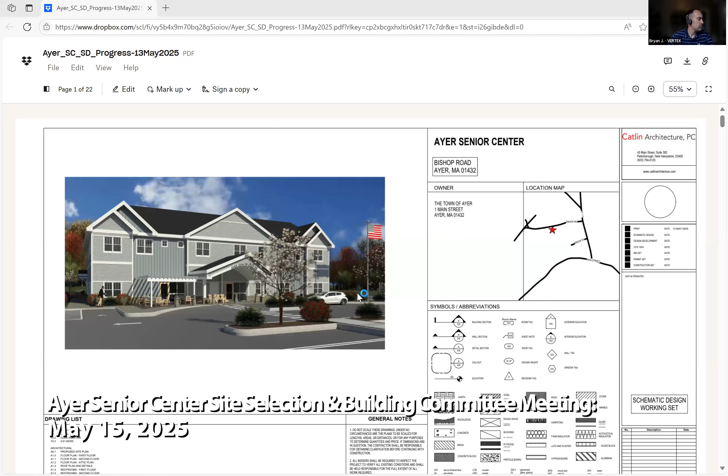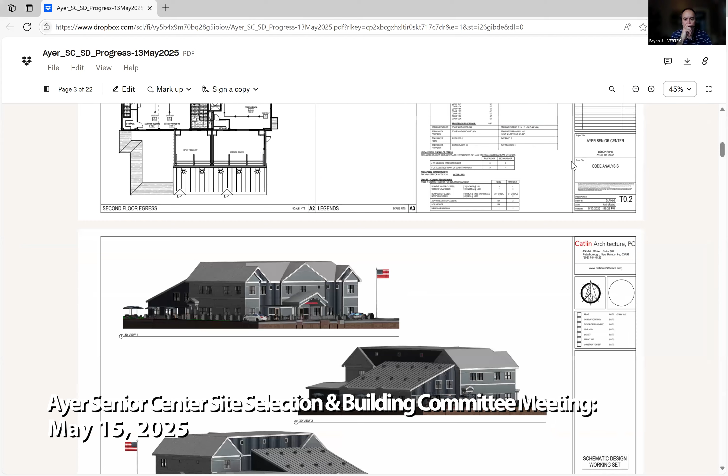This is a very early draft set, although we're moving quickly. My engineers have started on both the HVAC and the structural, and they're currently writing narratives for fire protection, electrical, MEP, and structural. Those narratives will be part of the package that goes on June 1st to our cost estimator.

Along with a set of drawings, our site fellows are going to be writing a narrative also. They're just getting engaged right now, so they're just getting started on that. A couple of things I want to point out that maybe we didn't discuss.

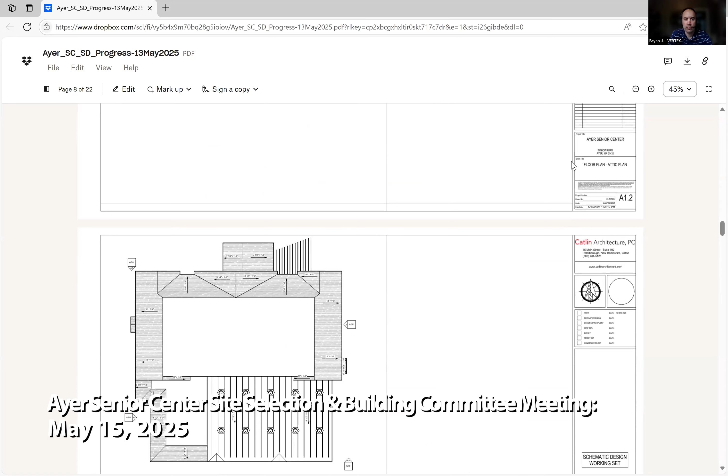If you could put up the site plan, go back a little bit. I guess I live in New Hampshire for a reason, but the state has some really new issues that came in under the new code. One is they want us to be planning for 2050, where everything's gonna be all electric. Whether we agree with it or not, that's not my call.

A part of that is an excessive number of charging stations. I know our team online can probably see this. No, I'm sharing this screen with them. Oh, I'll use the cursor where you are.

We'll probably have seniors parking there thinking it's a handicap space. I'm sure operationally you'll figure that out. I believe you're looking for some kind of grant for the charging stations. I know they're out there. My last 2 projects got grants for doing the charging stations, which would be helpful because they're not particularly inexpensive.

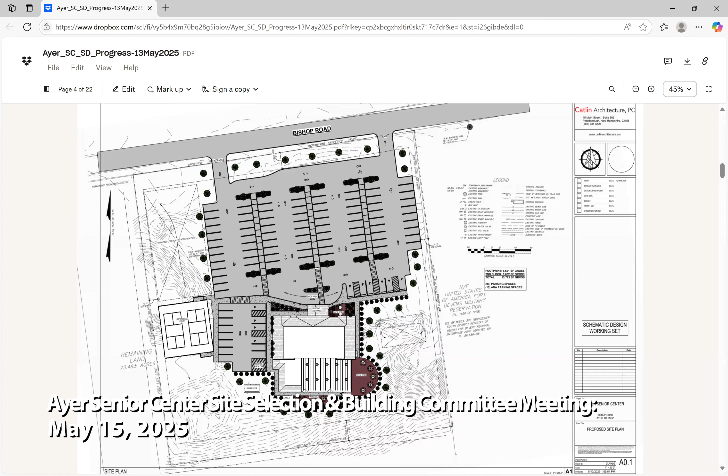Now, if you go to the first floor plan - great. What Dan has been doing is really tying down all the dimensions and locating things like... this isn't working, I can't see right now - the water bottle filler.

So this is not changed. It's been revised according to the way the committee wanted to do it from our schematic design or feasibility study. Now our engineers have done the column lines. We held them off on the actual steel design pending.

Well, we have that recent report now, so he's got the report. In fact, he wrote back, very excited. I know how structural engineers can get excited, but...

Well, one thing column-wise, these two here go from the first floor all the way up to the attic. They will be getting changed because right now they're currently on the second floor going right to the stairs. But other than that, that's the only column you're going to see that's kind of interfering. Everything else is all kind of tucked away.

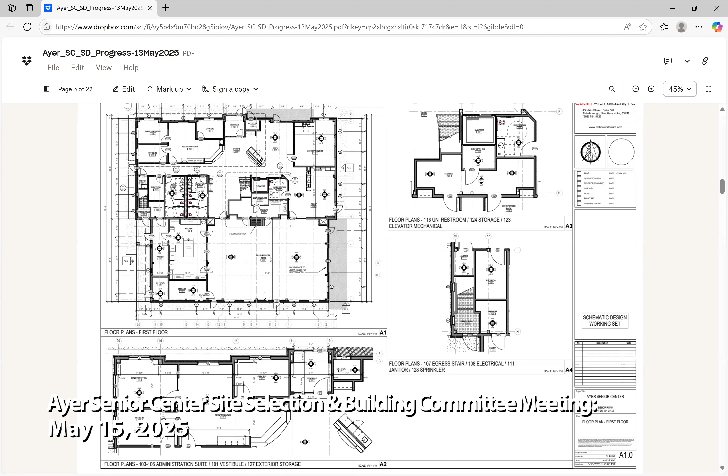So where were the columns he was talking about? It's different here now, over here this way. Like this, there's a column here and a column there. These are arriving separately, they haven't arrived yet, it's been developed a little bit more. We thought it was fixed, but no. So we just redraw it a little. This is why we're finding there's been a lot of movement since we last spoke. So now we're finding where there are conflicts that need to be resolved.

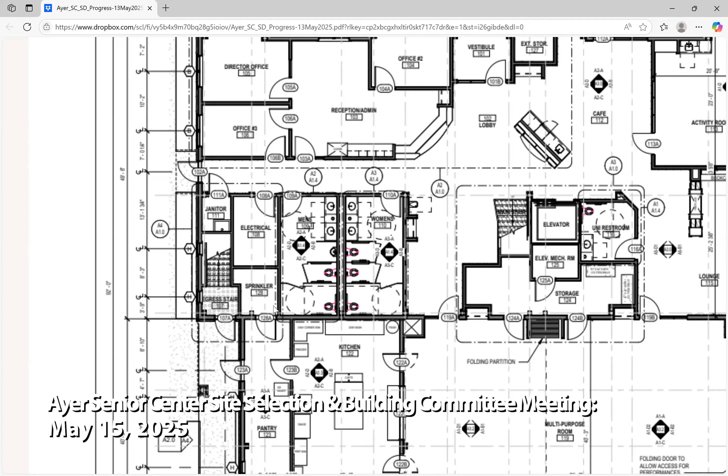If you go back to the kitchen - the kitchen is set up so where's the dishwasher, over here. This is dirty, this is clean. Your hood is over here, your stove and your ovens, so the hood is over this.

Get rid of that corner, that makes the kitchen - this is dirty up here and this is clean. Dirty's on the top - no, dirty's down here. Oh, this is the dishwasher down here, and it's up above the counter, slide it through.

It takes about a minute and a half for each. Now they're very different than our stuff that moves fast.

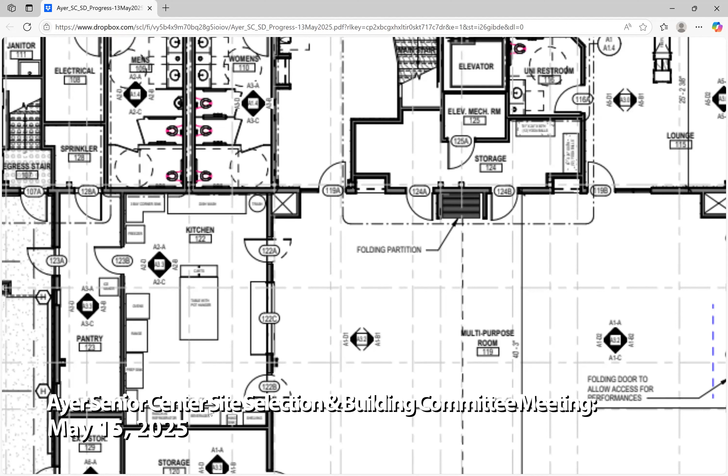Currently we are looking at, if it has to be all electric, it's not a big deal, but I would like to know what the grant is for going electric, because if it's only 30 or 40 or $50,000, it really won't be worth it.

Now, did we find out the difference in wattage between straight electric and induction? I haven't found any commercial induction yet. They're out there - at the food show we talked to my kitchen guys, Trimark had one. So if you contact Trimark, they had one at my Boston location.

The only difference between straight electric and induction is with induction you have to use a steel pan, you can't use aluminum, it has to be some kind of ferrous material. And the induction equipment's going to cost a lot more money. So what you're saving in cost, you're going to spend in material.

Well, it's a one-time expense though, unless you melt the damn thing - which I've been known to do with my aluminum ones. Then there's the time difference between an aluminum pan and a stainless steel pan, which is 3 times.

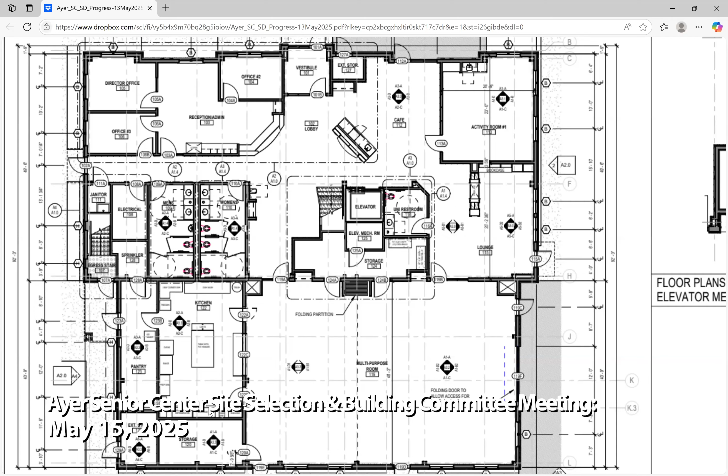All right, well, other than that, it's pretty much the same floor plan you've seen before. Upstairs, I still have a couple of things I want to suggest.

I can get shot down, I don't mind, I can take the pain, but I really think it needs sidelights into these two rooms. Even though they're small, we had originally a lot of glass there. I think there was some concern about that, but the door itself will be glass, and you can see through it, but the sidelights help.

What we find in community senior centers is that when other seniors are walking down the hallway and see action going on, they get much more interested in being a part of that scene. So there's a lot of transparency that we design into these so that people see what's happening.

And the yoga ladies will be somewhere else. This room has a large open space. Also the multi-purpose room for use for sit and be fit, yoga, and all those other things.

But I really think we need some transparency to make these rooms work. If you go to Longmeadow or Wilbraham, you'll see that when something's going on in a room, there's a lot of action, and that's what sucks in other participants.

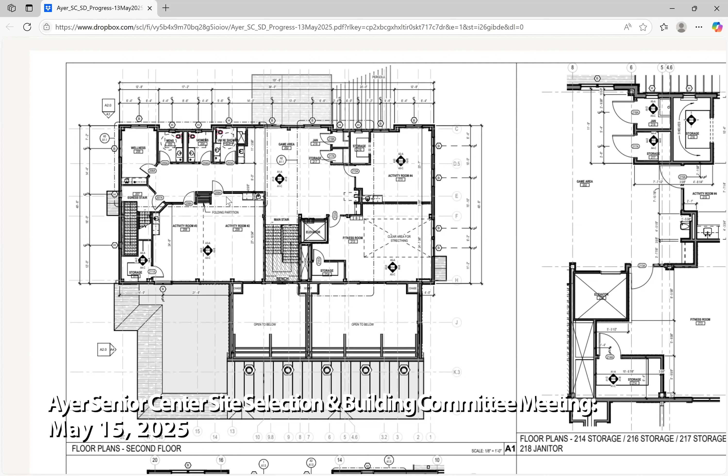If you go to Chicopee, they have a puzzle room that's through an opaque door, and you don't know if anybody's in the puzzle room or not. You have no connection to that. So we design our centers very transparent. The wall between the corridor and the room should be as transparent as possible.

But what about the walls between the rooms? Can they be solid? We don't put glass in there. We looked at one that had that, but nobody liked it, because it wasn't being used as it was intended to be.

Where was it? In North Andover. No, I did North Andover. I don't know, it was like... Oh, they changed it, that wasn't the design. The director did that. Right, it was all her fault. I'll write that in my resume.

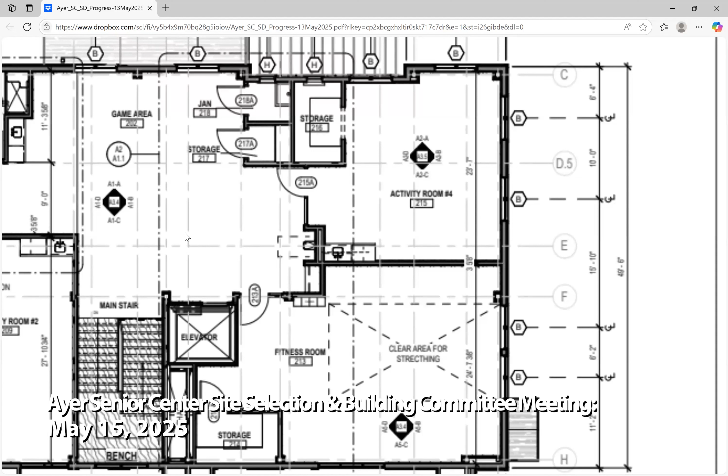Because I do think that having glass is just distracting for whoever's in the room. That room that's now being used as an aerobics room, that room was open before, as an open game room, and they had a glass wall to the room next to it. When she moved that all around, we still kept the glass wall. We weren't gonna get rid of it.

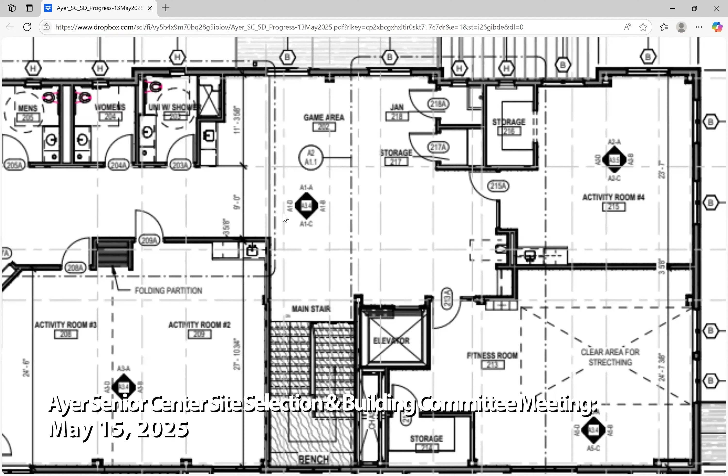I could put like a small, 18-inch or 24-inch little sidelight on those two areas, if that would be all right. I can try that out. I've already redlined that.

As a user of the Littleton facility, are there glass walls in the new one? Yes. I've been the one that's been pushing back against glass walls, but I'm interested in feeling the experience myself.

Yeah, and I think my next question is going to be, knowing that the building may not be 100% set, but is it something you guys have done a solar study on, just to check this? Solar study would be on the interiors, take a look at what? No.

We have lots of glass, and by the way, you should understand that on the south side we have solar screens to screen the glass. Also part of the design is that these lights, under the new energy code, you have to dim the outside perimeter lights during daylight. They do all that so the light level stays fairly constant. You're not burning lights where you don't need them.

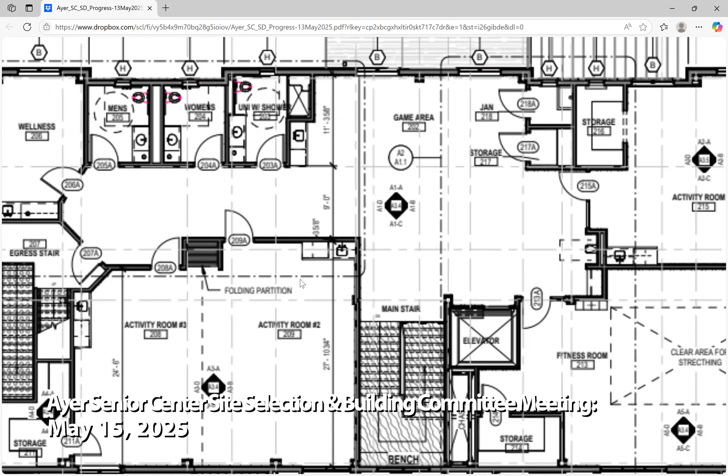In fact, I think in the multi-purpose room, you don't need to turn your lights on during the day if you don't want to, because we have skylights in there. There's 10 actually, currently it's 10. Let's make it 15.

But downstairs there's 3 panels. This is half glass, so it's like they're... and the glass up above. Okay.

I mean, not speaking as a user, speaking as a director, I would like to be able to monitor as I go by and make sure all is going well, people are happy, things are going well.

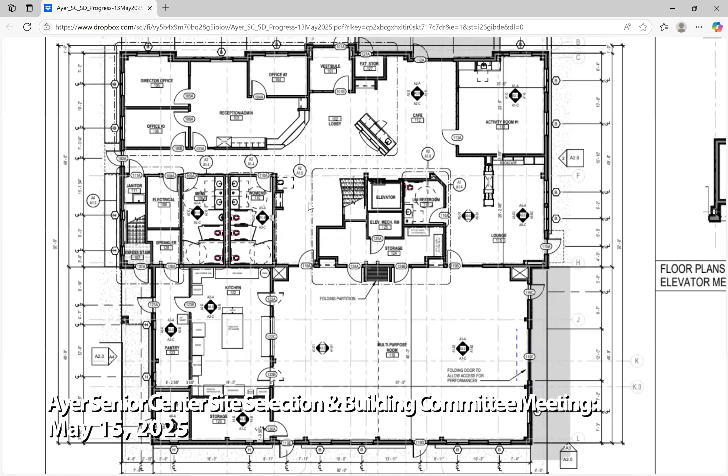Yes, you'll be able to see through these. I like the idea of glass with the acknowledgement that if people really aren't enjoying it after some period of time, like 6 months, then we look into frosting the glass. I think there's a risk of having too much glass, that's the fishbowl effect, that everybody is looking.

We've had a similar experience where people have lived in it and said, oh, this is a little too much, and we go with some sort of applied sticker veneer where you can pick the specific amount of light and transparency through it. It's relatively short, we had a little track and you just pull a curtain across it, pull it at your will. It's not a big deal, but there are fancy ones where you can push a button and have it.

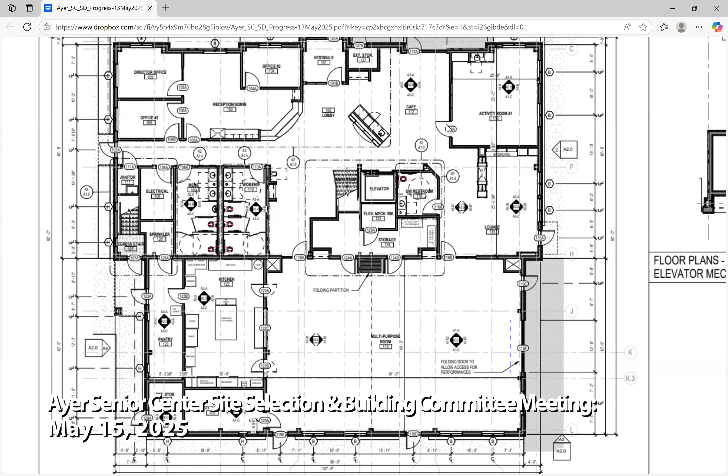They do that, by the way. Have you seen that glass? Yes, it's really nice.

Let's add another 500,000 to the project. They use those in bathrooms in Europe. There's a lot of windows out onto the street, you close the door and... Who has the Windex concession? Just gonna do straight ammonia.

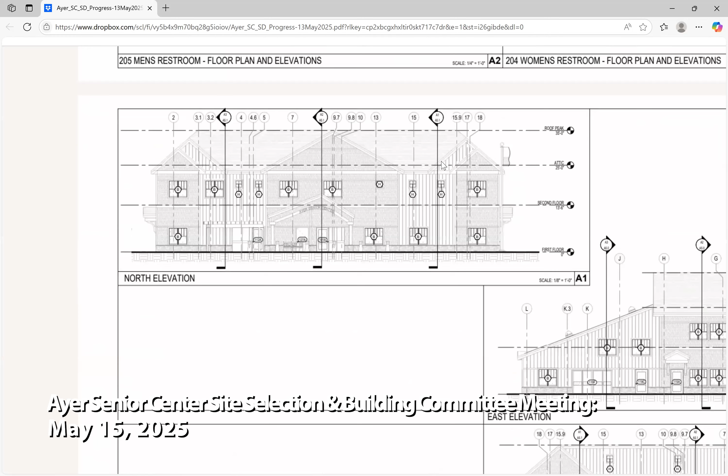As she's scrolling through this, the elevations haven't really changed, we're just now much more detailed, with a lot more dimensions on them. It's a combination of board and batten and clapboard.

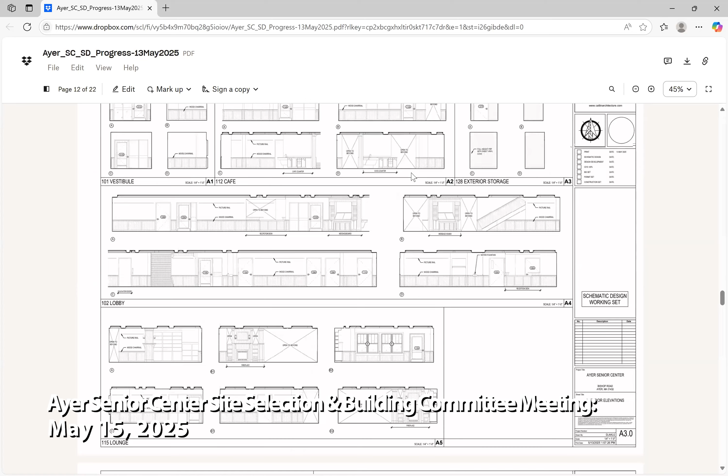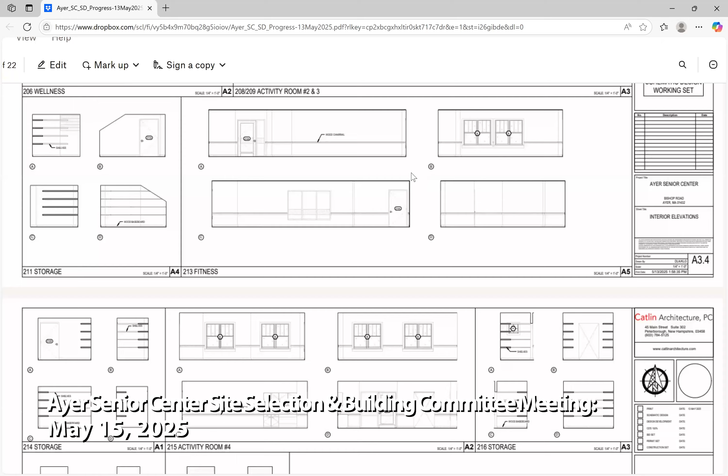There's a stone base currently, a cultured stone base applied. Mostly because we found that when the clapboard or board and batten comes down low, it gets banged up, especially since we have a sidewalk going all the way around it and they're gonna be plowing and shoveling. We prefer something more resilient. It is a little bit more money, but I think it's well spent. It comes up to the bottom sill of the windows, and when we get around to picking colors and materials, we'll be picking the stone, which is cultured stone applied to the frame system.

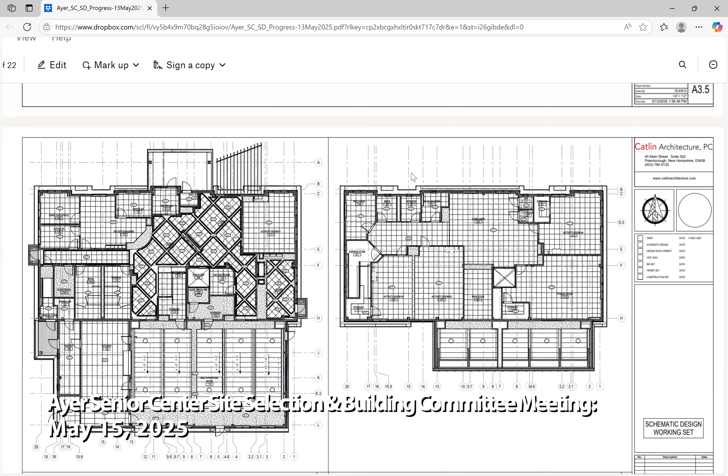Is that around the whole perimeter? Yeah, the entire perimeter. Because currently we have a walk-in area that goes all the way around the whole area, and we're gonna be having snow guards all the way around to keep the snow from crashing down on people.

I wish there was one over that door. But in Massachusetts, it won't be snowing in 2050, so we don't need it.

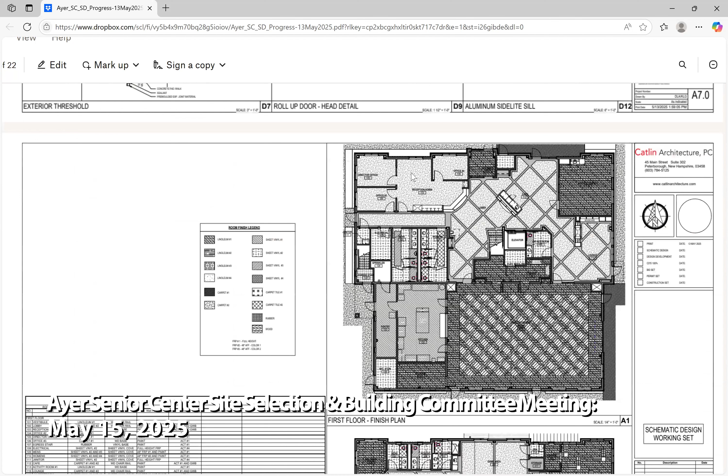I don't think we've done it to reflect the ceiling, it's never done to... oh, I'm sorry, I'm just scrolling, doing my thing, there we go. So, most of it's...

Upstairs are all 2x2s, full length acoustical ceiling tiles. We use an NRC 0.95 absorption. This doesn't absorb anything, so a lot of the noise builds up, the carpet helps a bit. This is working pretty good, surprisingly, if you go to any of these other centers using this particular ceiling tile, it really keeps the background high frequency noise down, which is what we have a hard time hearing through as older adults. High frequency sound interferes with our ability to hear well, so we do a lot of work with controlling acoustics.

Especially when you get a big crowd and everybody's chatting it up, and the lobby is a good example of that.

We have a very loud, active area here, and a quiet area over here. It moves from one to the other. These are broken down into 8x8 grid, coffer type ceilings, and the rest of it is pretty much straightforward.

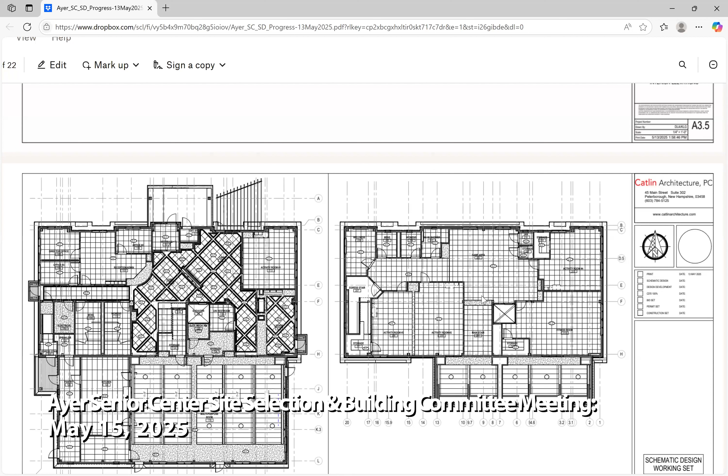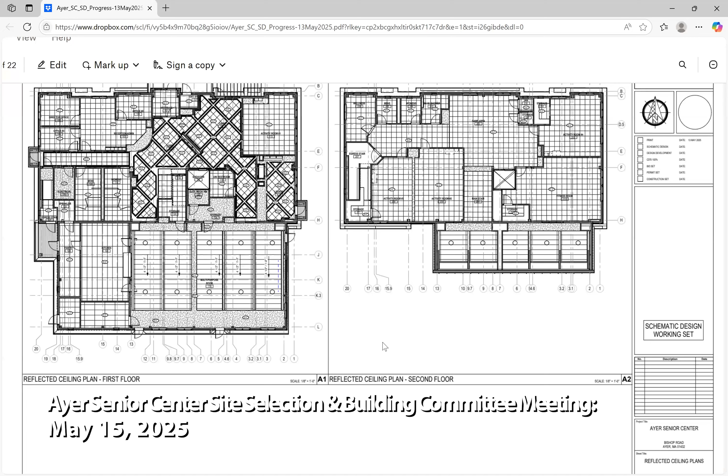Ceiling tiles, 2x4s, 2x2s. Now if you go to the floor plan, which is part of our movement issue... no, other way. Okay, just look me up. That was the other way. You were looking at the finished floor plan. What, so am I going back to that? Sorry, everybody tell me what I'm looking at. Yeah, the bottom right-hand corner. Is this the finished plan? No, keep going all the way down. I was looking at the last one. More, I'm already... there we go, there we go.

So what happens now is that the coffered ceiling is reflected in the floor pattern. The floor pattern is designed to give what we call wayfinding for people with visual issues, allowing you to see where you're moving. We used to do a game a long time ago: take a big open room with the same floor everywhere, put on glasses smeared with Vaseline, and tell everybody to stand at one side and walk straight across. It depends how you walk, because we don't see the contrast on the floor, it's all uniform. As we get really old, we wander around. This pattern allows you, with macular degeneration, to visually see where you're moving. So we give patterns on the floors.

This room is a basket weave, and it's linoleum with some acoustical properties combined with a ceiling system. We also put some acoustical panels on the walls to control high frequency noise, especially during a presentation, so people are able to hear it much clearer.

The kitchen, bathrooms and storerooms are all seamless vinyl. The kitchen has a non-slip vinyl system, and it's seamless, so it's all washable and reasonably soft, so when you drop your wine glass, sometimes it will survive. Bathrooms are also all seamless, with a different pattern since we're calling it a different material there, but it's all seamless.

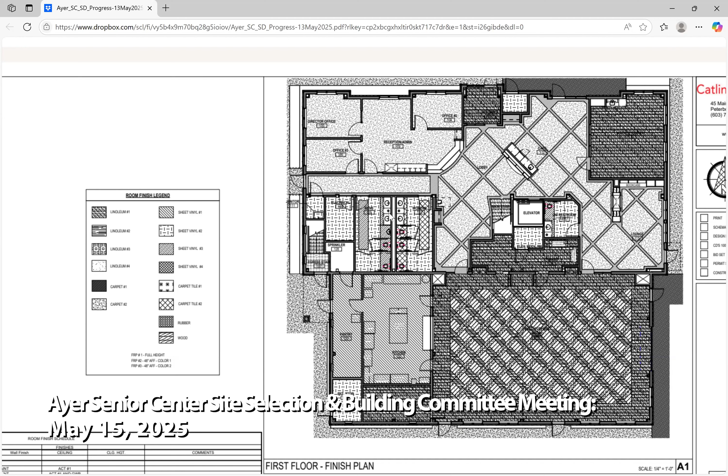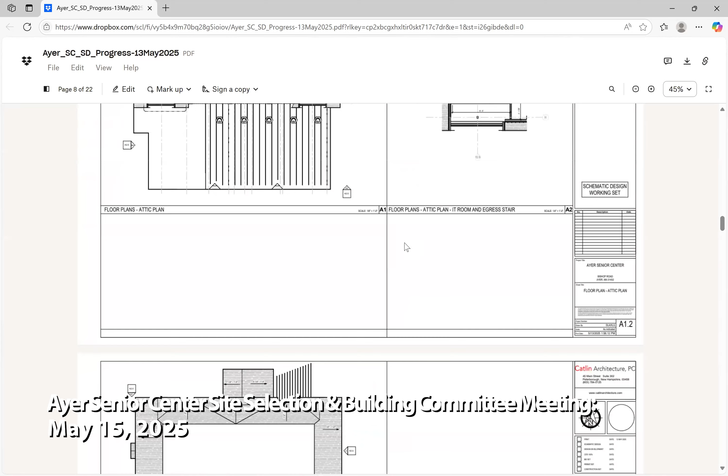It goes in up. If you go to an elevation of one of the bathrooms, and the kitchen is the same way... I think, Dan, where are they? The elevations are way up. Way up here? Yeah, for the room kitchen elevation one, the bathroom ones are some of the below. 1.3, there you go. So that... no, so they're off the floor. Oh, one more, go one more. There we go, so they're...

You see our line here, 4 feet off the floor. FRP up to this level, you can take a view. That's the view in the bathroom. In the kitchen, it goes all the way.

No ceramic tile? No, okay, fine, it's much cheaper. Ceramic tile sucks, excuse my language.

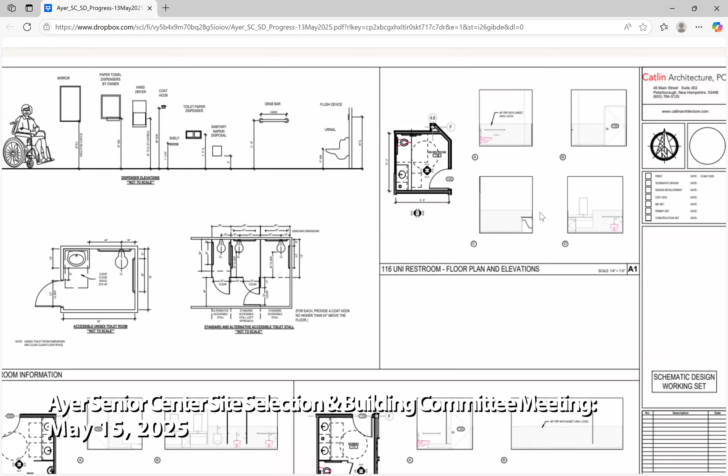What about the janitor's closet? You use the FRP all the way to the ceiling, same as in the kitchen. When they come down to the floor, they integrate with a seamless roll up, there are no joints at all. So the bathroom floor integrates into the FRP, same in the kitchen, and same in the janitor's room. If you looked at a big blow-up of the joint, you would see the vinyl comes up and integrates with a fitting into the FRP.

Of course, it's all handicap accessible.

We'll talk a little with your facilities folks as to how you want to do paper towels or blowing air. We usually do hand blowing air, and we do have a disposable option integrated in, they're a standard supplier for town buildings. Like we see in the fancy places, there's a little bowl, you throw paper in there and other stuff. Sometimes they throw in the accessories, you already have a contract with them.

You may have the way you want your soap done. Right now we use Bobrick soap dispensers. We're not really big on it, but everybody around here likes it. What about that high speed air accelerator? Well, the problem is it throws bacteria all over the room. Also, at my age, when you put your hand underneath, your skin kind of moves around and leads your hand. I'm into a little bit softer ones, Toto or one of those guys.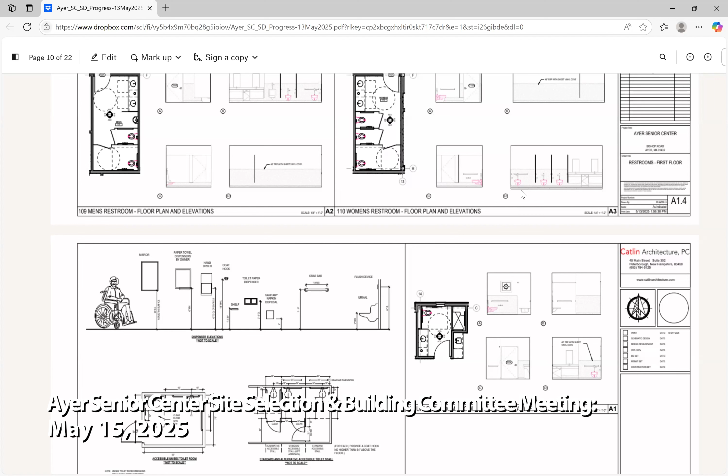Midway up, there's a landing with a snuggly seat - a resting spot for us old people - and then it goes around the corner and back up.

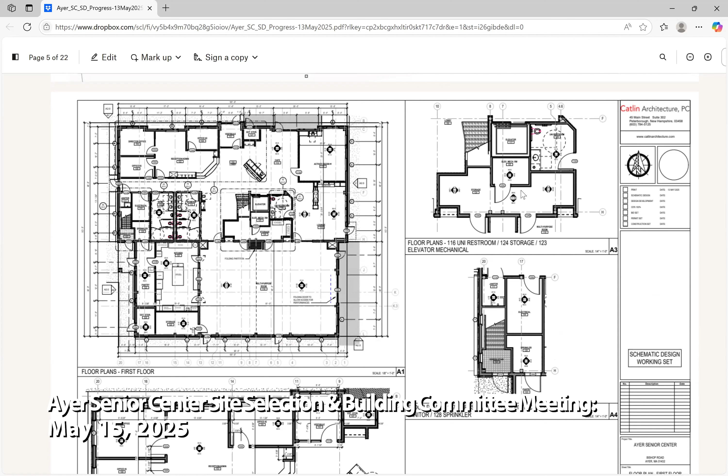I think the stairs show up here, right? I haven't fully developed the stairs yet, but they do show in the exterior elevations. That's the stair, it goes up and comes around. If you go to the 2nd floor, you'll see it better - the landing. There's a bench here, so you come up, come around, and go back up this way with 6-inch risers.

Transparent railing system - we use HDI for our railings. Standard treads, wood treads, but they have a luminescent and rough edge to differentiate the edge so people can see it. Otherwise, if you do the same stair, say maple, it all looks the same, so having that edge change is very important.

Dan, the stairs that go up to the emergency stairs - the ones to the 2nd floor - do those also get finished? Yes, they're gonna have a rubber tile with that luminescent strip on it, so if all the lights are out and not even emergency lights are working, they glow so you can find your way up.

I've marked it up on our set - we need a little bit more room for our refuge area. It's not quite large enough. We'll have a space up here a little bit larger. We need to work with this in order to have an area of refuge, because if there's an emergency and you lose power, or there's smoke and fire, the elevators are not supposed to work. We don't care about anybody who can't walk down the stairs - I mean, that's the code - but we do, even though it's only a two-story building and it's not required.

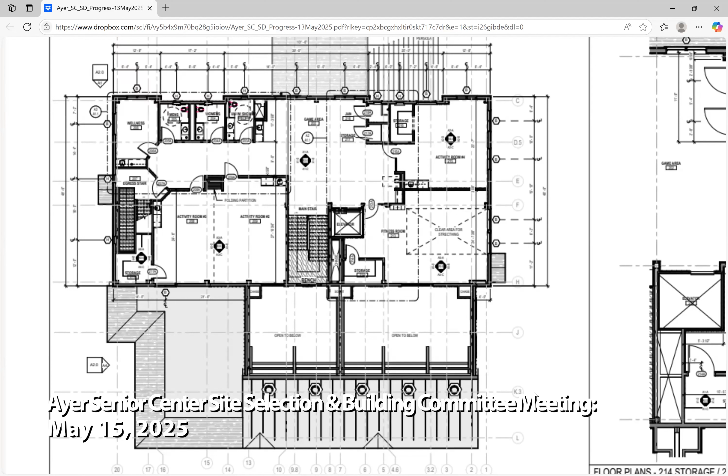They're like 20 feet long, they look like a train. If you go to the attic, which is a little farther down - there it is. This is the top of the elevator, and this is our IT room.

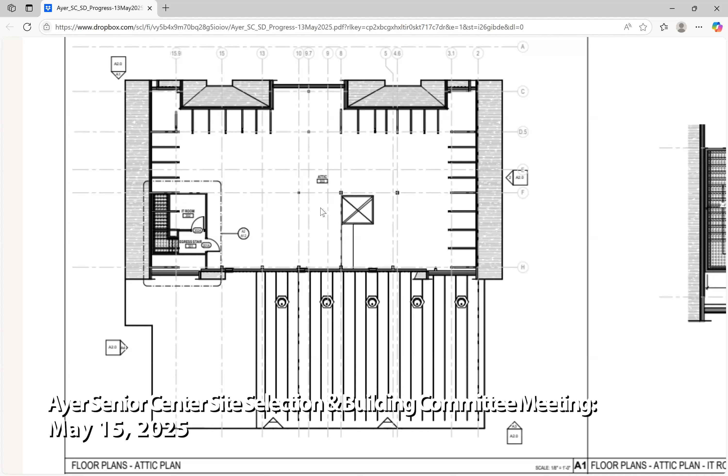Where's the IT room? Right there. And that's the access to it. There's gonna be a ladder - it doesn't show right now - up to a roof hatch, or it shows up at the ceiling on the roof plan if you go down a little farther. No, it doesn't. Oh, there's the stair, some of my markup, that's it.

These are the solar tubes that light the multi-purpose room - I'm not kidding, during the day it's like a full moon, it lights the room, you can walk around as if it's daylight. What's the diameter of those tubes? They're 21 inches. We've been using them for years, very effective - we're shocked at how much light it brings in. If we're really feeling generous, we try to put them in the bathrooms too. You don't have to turn the light on.

I think it would be important for us to consider where the provisions were in the event that solar wants to come into this building years down the road, because that's part of the code too - the location. That's our big flat roof. That currently doesn't have any... I'll mark my words, John.

Wait, it's flat? We can only go 34 feet high, so if we kept it nice and low you would never see it. It's not angled at all? It does have a slight pitch, but it's basically flat. In a snowstorm there could be 4 feet of snow up there - you'd have to shovel it, going up through the hatch. We never get snow on our roofs though.

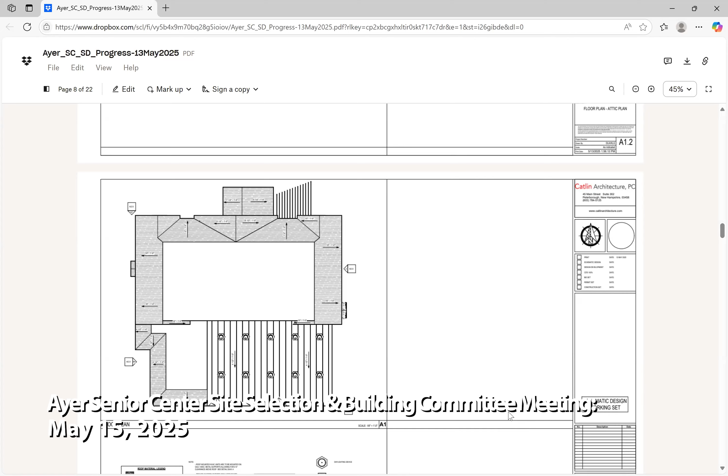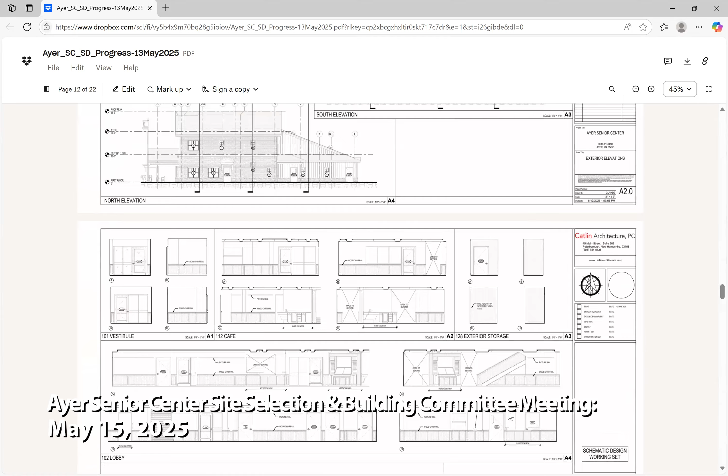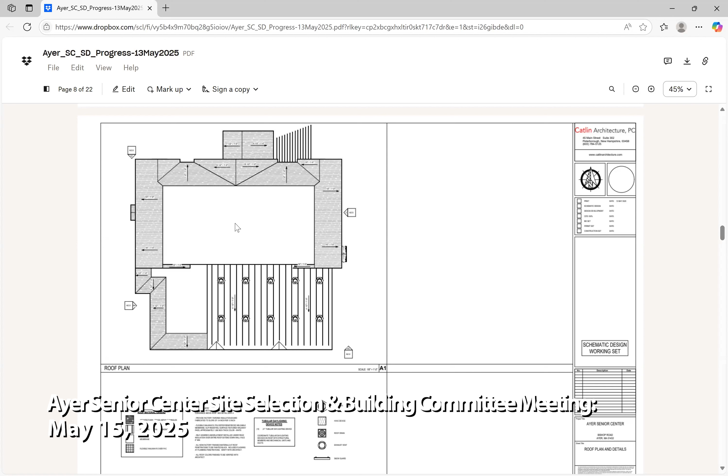Just to go back to the question Bonnie brought up - is there a section through this, showing the elevation change between the flat roof and the top of the pitch? It drops down very low - oh, there's no parapet. It's just very tiny, no parapets, no. It's going right up.

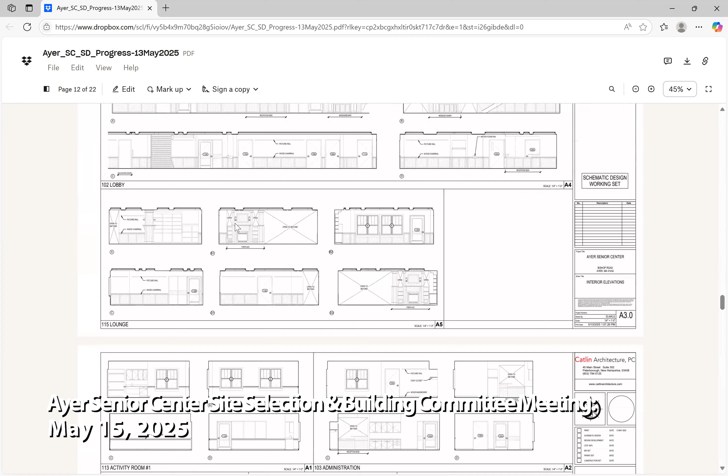Yeah, in fact, there's a breather, and some kind of detail comes out where you're going to have the asphalt turn to rubber at the flat roof points. We have a continuous vent at the edge. It's not custom, it's a standard unit, a roof vent all the way along.

So what's it, let's find an elevation. This would be like flat. The insulation, the rigid insulation on top, so there's a minimum of 3.5 inches, and then it's tapered.

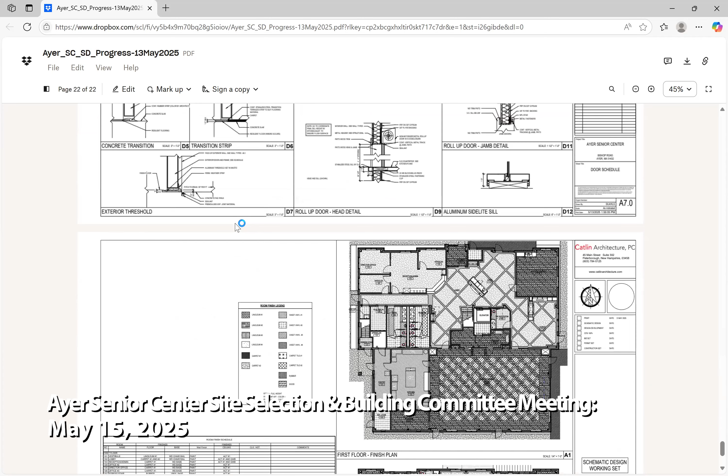Hey Dan, where's our elevations? You looking for building section? Yeah, building elevations, they're after the floor plans. Before, keep going. There we go. Go up a little bit, just a better view.

Well, I can't see it here, but where this is our flat roof, this is the slope roof. If you're standing on the ground, you'll never know there's a flat roof up there. But this edge right here is vented, and I think the building section will probably be best.

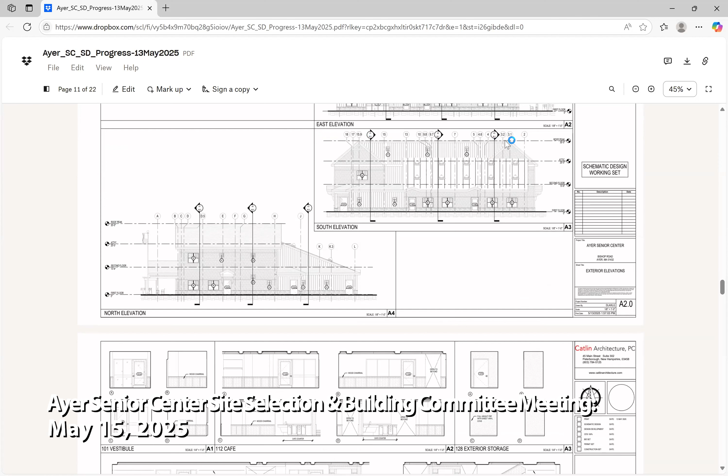Yeah, like one of those sections you got there. Way down. Yes. Farther, keep going.

Right there. Yeah, so up there at the top, where it will be flat, vented all the way along. These will be vented down here, so there'll be no real wall, it's just going to be like flat. I don't know, it just goes. The detail works out really nicely.

And by the way, the roofs breathe. We use a Hunter panel. So in order to get an R60 roof, we have 7 inches of closed cell foam. On top of that is a Hunter panel, which has about 3.5 inches of poly iso. Then on top of that is a 1 inch space with a panel above that, with spacers in it, allowing that roof to breathe all the way up. So the roof is cold and the interior is warm. And that's all of our slope roofs here, have that Hunter panel on it.

And our exterior walls are a zip R panel with 1 inch of insulation, with 5.5 inches of closed cell foam. That gives you an R40 in the walls, R60 in the roof. So the walls are basically a spray foam, closed cell. And the whole idea is that the building is ventilated and the roof systems are ventilated, so you don't have the moisture problem, and the closed cell keeps moisture from moving up through it. The zip R panel is a breathable panel, the green panels you see on new buildings being built. The roof ones are orange.

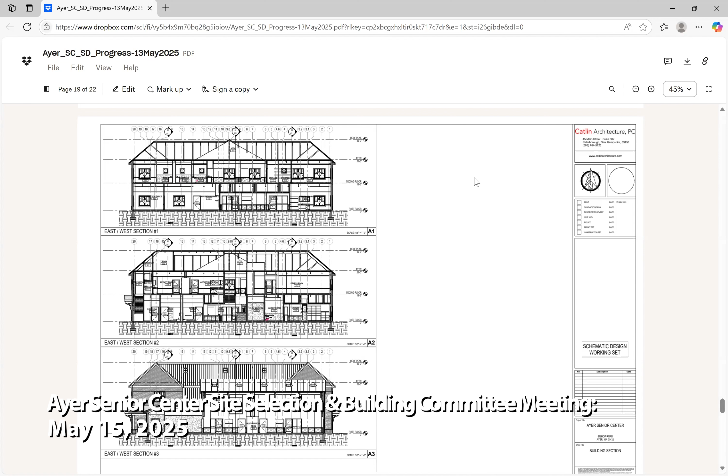Thank you very much. The glass, let's talk about the glass. What about the glass, who makes it? Right now we're speccing a Pella, metal clad with wood interior, Low E, all the stuff that makes it extremely energy efficient. They're all Energy Star. It doesn't mean they have to do Pella, we give them 3 options: Marvin, Pella, and whoever else.

Is it double or triple? Double. I don't think triple is worth it, you don't get anything out of it. There's some new ones out now that are much better. But we did Wellesley with triple. Should have done the double. They wanted triple, so we did Marvin triple.

All our other projects have been... I think Wilbraham didn't end up being Pella because Pella was having problems with supply chain issues. Down the street we used Kolbe, which I didn't have much experience with. Actually, really nice, they were nice. I like Kolbe. I do big private houses.

It's a good question, Canadian. I think it's Canadian? Oh, got to cross the border, forget it. No, no, I thought they readjusted all those. Yeah, they're moving around like a snake through the grass by the time we get done.

Yeah, we spec it around a Pella, metal clad, no matter who it is, it's going to be metal clad.

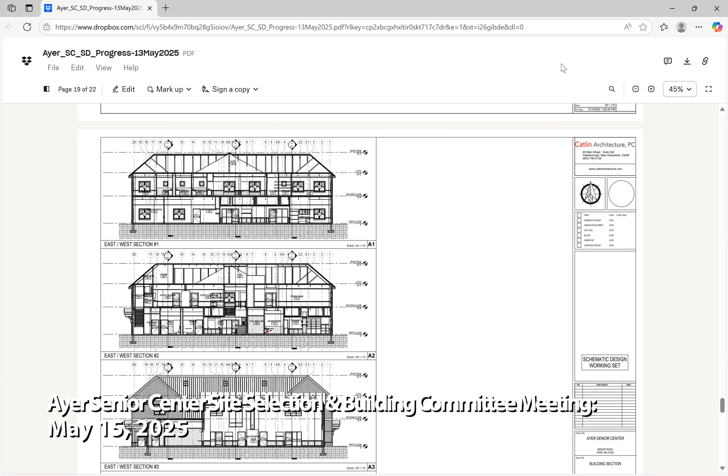I want to just - Ms. Chair? Yes. John, can you just keep following up on the requirement to go for possibly 800 amps to 1200? That's a 50% increase. Oh, I think it's horrible.

She told me really that, you know, what's going on - well, it's the state coming back and saying, Massachusetts, we're gonna build an energy efficient building and make you build it all electric, therefore it's gonna cost you another $100,000. I don't know. We're working with her right now. She broke that news to us the other day. I don't know whether Littleton had that - I don't think that was in effect when they got their permit.

It's now in effect. And she's really good - she's worked with us for a long time. She sent it over and said, John, you read it. And I handed it to Dan and said, you read it. We're working on that right now. I think by Monday or Tuesday we'll have it figured out. It just arrived on our table Monday, I think.

And I think a question also might be - if the intention is to go electric in the kitchen, if that's a breaking point on that decision, that might weigh heavily on the decision to step up.

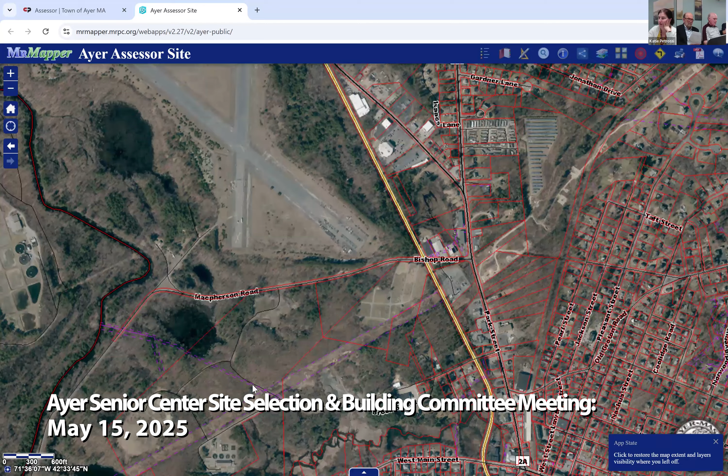A bunch of photographs with text—photographs for the potential connection to the line, photographs for the potential location of the transformer, and drawings showing how to get from the lines to the site through the gravel road that's there. Anyway, that's what we sent. Since then, it looks like we have a follow-up meeting.

It could be a big deal if they say they can get off those lines. So in the process of doing the site walk with Dan, what we discovered—I think we discovered it, wasn't clear—was that the sewer treatment plant there is being fed off the same exact lines we'd prefer to use for the senior center. So they currently have an account off the same lines.

It turns out these are not typical transmission lines. There are 3 sets of lines in the easement. Two of them are typical small versions of transmission lines. The third set is more like you'd see going down a regular street—that's the set of lines we're asking to tap off. So they have a current 3-phase power connection to those lines.

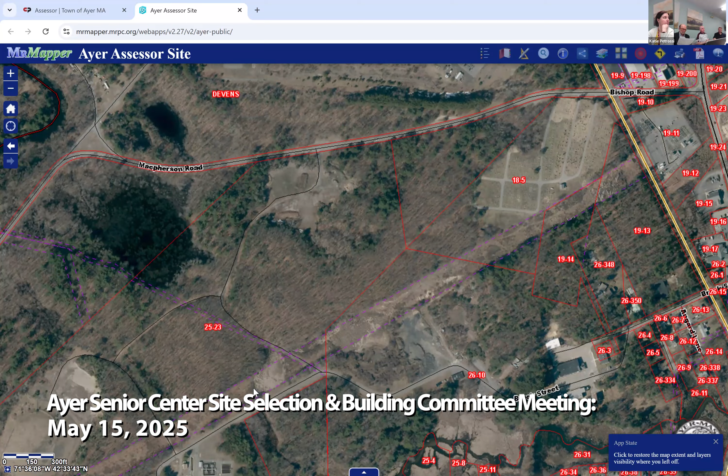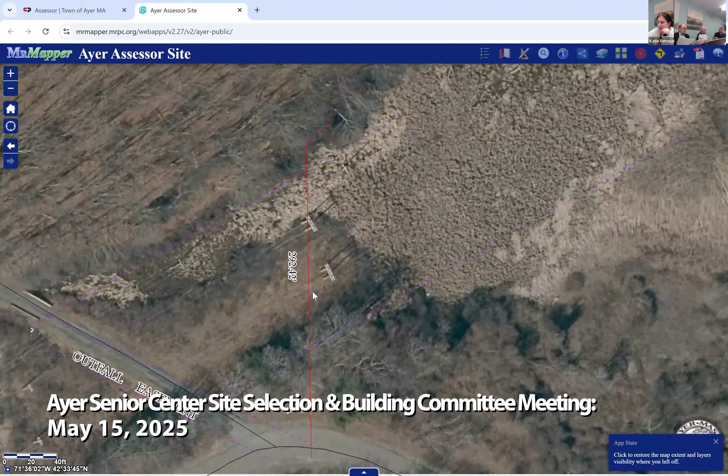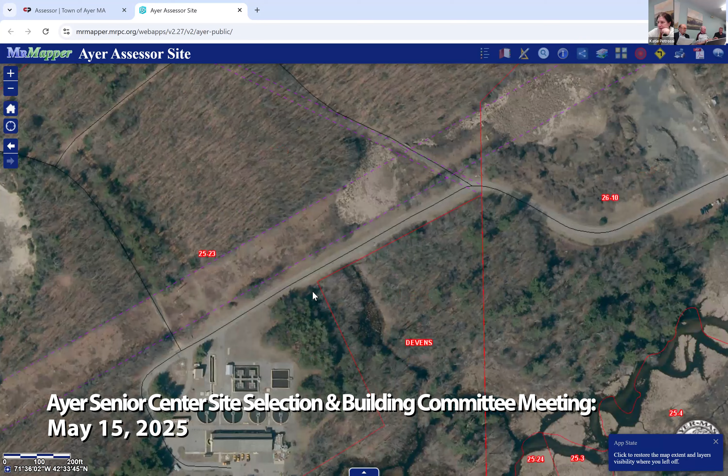Details of, say, cutting down the street—we could do the trenching on our own, but it's got a lot to it. So we'll see what happens.

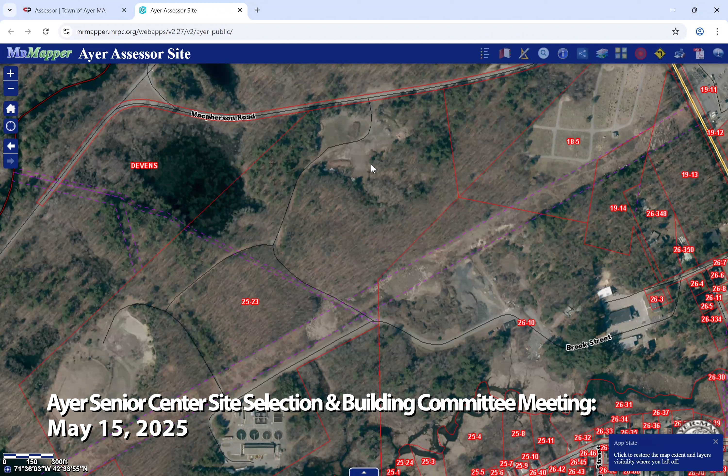From an optimistic standpoint, at your next meeting, do they give any timetable for when they can mobilize, or what their usual process is for engineering on their end? I think we're still kind of too high level because we're figuring out whether they have right-of-way legal work with Mass Development, stuff like that. So we're still trying to nail down the total scope and then we'll go from there. But if it were to come off DPW property, that would be the quickest way, probably with the least red tape.

We'll wrap up, but we're going to continue working after June—we have plenty of stuff to do. We'll work through June and July, but by July they should have good direction from us, and then we've got to get through town meeting and the vote. Our estimate, if it all goes favorably, is October 27th. So we have some time, and I think what needs to happen is we need to start lighting a fire under them.

We have it. And we need to give them—because they're notorious, as Brian's pointing out—we shouldn't make it any easier than it already is. It looks very positive; it should be pretty much a no-back-and-forth situation. It's very close. There's almost no way that it doesn't work.

Engineering wise, I don't know, we should have to draw it up. Good, we could put all that money into our project then. We're hoping this works. We'll see.

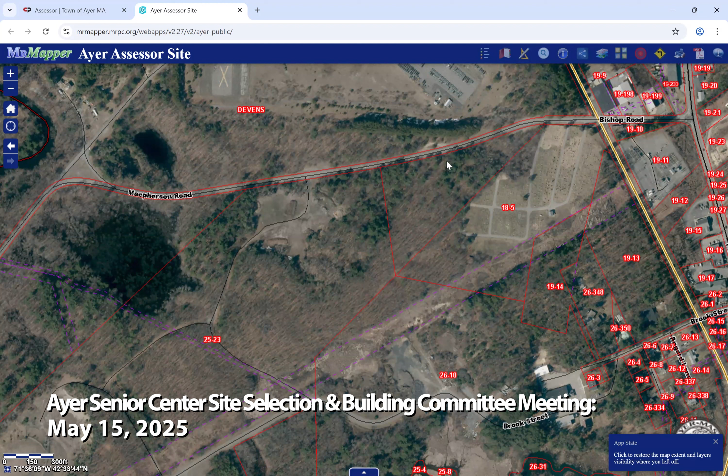Very good news on that. Yeah, I think there may be broadband grants for bringing broadband to unserved or underserved locations. Because our location is obviously not served, I think Comcast may have grants available, maybe required to do it, to bring broadband to that location, which doesn't currently exist.

That was one of the statements National Grid made after they determined that yes, the land is in the town of Ayer, and yes, it's in our service area. Yes, we do have an obligation to provide you power, you are a customer. So that's what they said.

Well, Comcast brought fiber out to my island. I thought that, well, for fiber, have to. Proud of you that you did, Terry.

All right, next up, seismic analysis. I think we already know what's happened there. We reclassified to class D. Move on, okay.